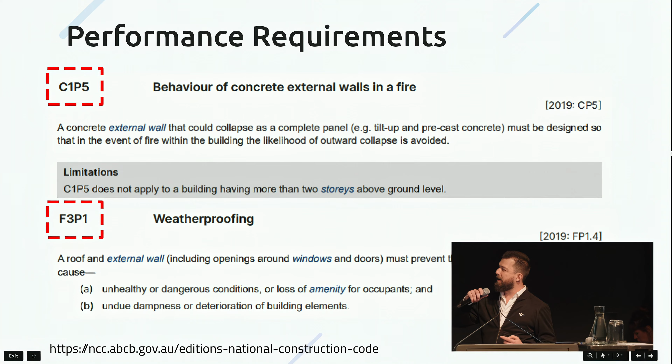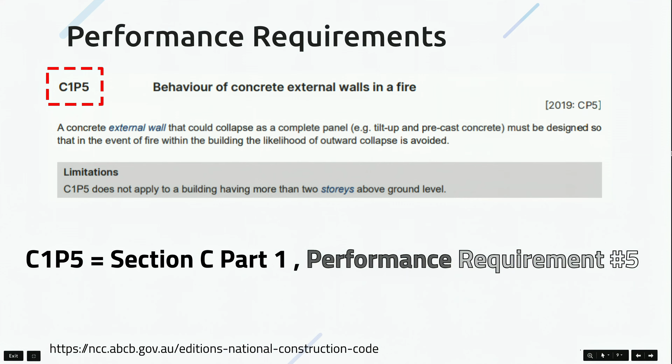Cool, James covered this earlier as well. It's the naming convention. How do you know you're looking at a performance requirement? It's the 3rd letter. So in this example here, C1P5 means Section C, Part 1, Performance Requirement Number 5. So anything where the 3rd letter is a P, that's what we're looking for.

So a performance requirement then needs a performance solution if we're going that way. And this is just what the ABCB defines as a performance solution: it provides a tailored solution to meet the intended objective of the performance requirements. Makes sense?

Okay, next one: how do we create a performance solution then? It's a good question. Sorry about this, guys, I don't know why that's lagging like that.

Okay, it's a 4-step process. We're going to go through each of these in detail. Step 1, we're going to prepare a brief that lets everyone involved know how we're going to approach this certain issue. Step 2, we're going to analyze the actual design we're proposing and maybe iterate and change it if it's not up to scratch. Then we're going to evaluate all of those results, compile them all together, and finally we're going to prepare the final report.

Okay, so step 1 is the design brief. Like I said, this lets everyone know what the performance solution is going to cover. The way this came about, it was actually introduced in NCC 2019 Amendment 1. The reason for this brief is that performance solutions, when they were rarely done, all looked wildly different. You could have one that was a 2-page document, very simplistic, and then you could have others that are 200 pages with a lot of supporting evidence, right?

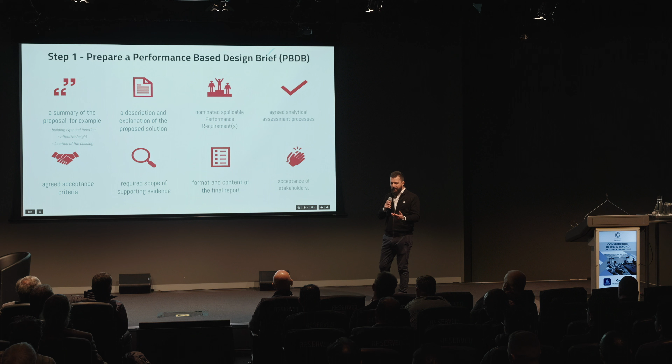Next one's quite important: agreed acceptance criteria. What would this be? Water doesn't come into our building - right, if we can prove that, then that's the criteria we're looking for. As an example, required scope of supporting evidence - so we'll define what we're actually going to deliver as part of that justification. Format and content of the final report, just a bit of an outline on how you're actually going to compile all this information so it can be digested.

And then finally, acceptance of stakeholders. Now, stakeholders is anyone that's involved in the delivery of that - your builder, your architect, structural engineer, maybe facade engineer, of course your surveyor, your PCA.

Okay, so let's do a bit of an example of what might be contained in this. So this is using facade. Facade's actually not my strong suit, but I think it's a handy little example here. What are the design objectives? Well, it's been identified that the cladding must provide a degree of weatherproofing in order to satisfy the performance requirement, being we don't want water coming into our building.

So who should be consulted? We identify that the client, the builder, the testing authority, appropriate regulatory or approval authority, which is our PCA or our surveyor.

Next one, what's the basis of the performance solution? Well, why does it have to be a performance solution? There are no DTS provisions, so by default it is going to be performance-based design.

What evidence are we going to use to justify this? Well, fortunately the NCC actually offers us a verification method. That's found in FV 1.1 and table FV 1.1. If you apply that verification method and get a positive outcome, then that's how we're going to justify - that's going to be our evidence.

Which DTS provision is applicable? In this case, none - we don't have any, unfortunately. And which performance requirement is applicable? So it's going to be FP 1.4 in the old way of doing things - I should have updated that now. It's F3P1: a roof and external wall, including openings around doors and windows, must prevent the penetration of water that would cause harm to the amenity of the building.

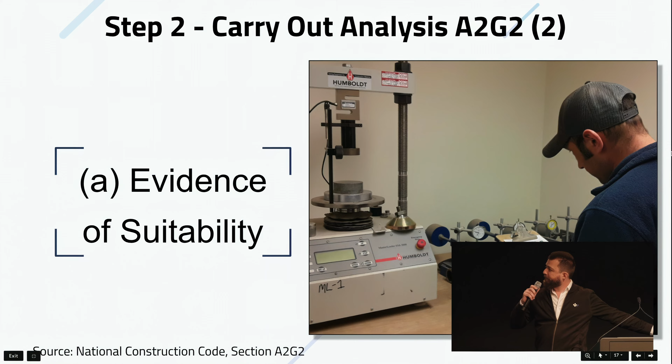Next one, verification method. So we talked about this. This is the FV 1.1. What we effectively have here is a mock-up, a prototype of a facade system. This is all well controlled, the amount of water, the amount of wind pressure we're applying against it. You follow this method that tells you how we're going to test out this prototype. And quite simply, if under these specific conditions water is able to come in, it fails. If water is kept out, then it's a pass. So nice and simple there.

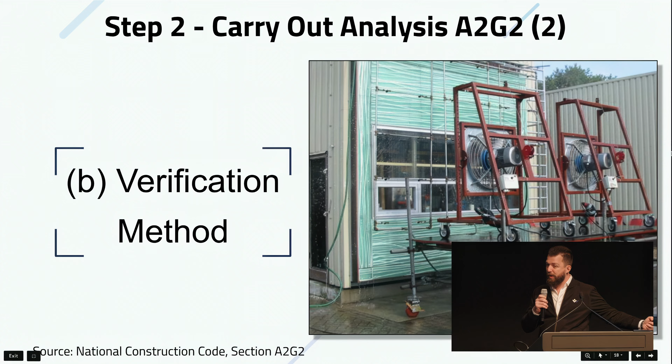There are a whole lot of verification methods. This one is mentioned in the NCC, but you don't actually have to use one that's mentioned in the NCC. It just has to make sense for the scenario.

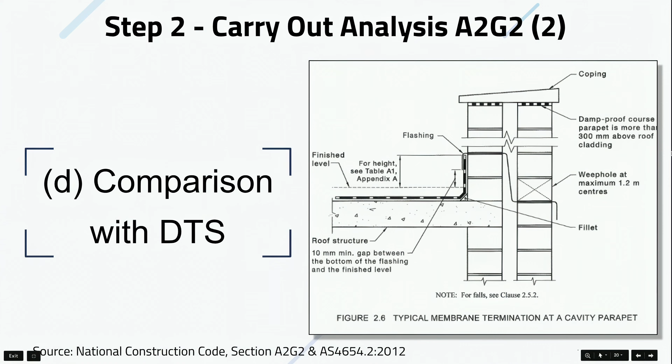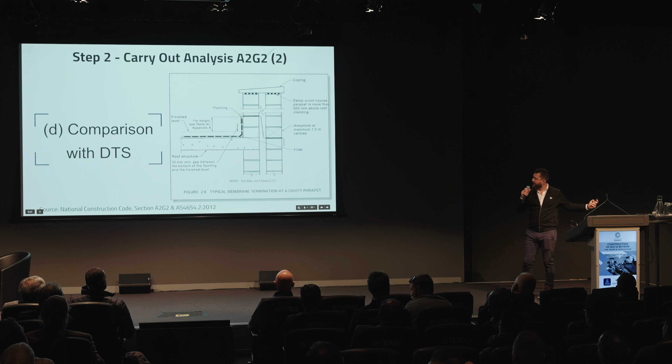We have upturns, we have cavity protection. Using a combination of expert judgment, you can say, well, okay, we've actually got a precast wall here, and we have a suspended slab interfacing with it, and we're going to apply our waterproofing upturn, and then we're going to have a high-build elastomeric paint over that and get continuity of the protection. We're not doing this exactly, but we are doing something that's going to be equivalent performance, and that's how we're justifying our performance there. So those are our 4 assessment methods that you have at your disposal to justify how you're going to perform.

So then after all those things, we've got this little flow chart here. It's pretty simple. This is just carrying out analysis. Pretty much what it says is do whatever you're doing, apply a test method, research the documentation. If it doesn't work, then go back and rethink it again. Maybe you need some more elements in there or move things around a little bit. Then apply the process again. We get a good outcome we're happy with, being we're keeping water out of the building most of the time, then yes, we move on.

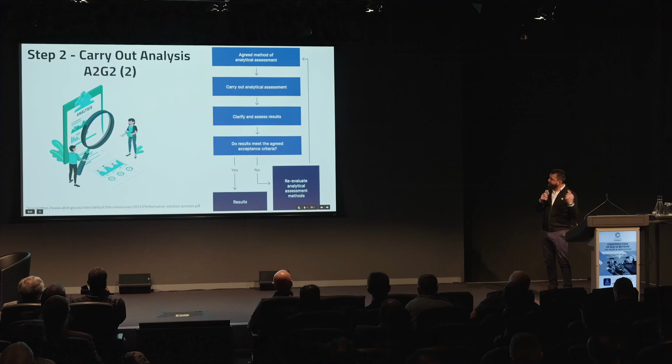And by move on, I mean step 3.

So step 3 is evaluation of results. I know this can sound very similar to analysis, but what this is, is compiling everything together. Often you'll have a lot of different supporting evidence doing different things. You might need an additive for concrete for a certain purpose, and then you need an upturn over here. Most performance solutions won't just be one element. They'll have a lot of things going on, and you need to compile it all together. I've got some examples at the end of this, which we can talk about, and I'll explain that further. That's pretty easy. Then finally, we prepare the final report.

So this is really just compiling everything we've done to date. We've looked at everything, we've considered all the options, we're just putting it together, and we're making it tell a cohesive narrative. I've seen a lot of performance solutions that have been rejected by certifiers, and it wasn't because they didn't have a lot of information. They actually had an abundance, 100 pages of documentation, but it wasn't compiled cohesively, and it didn't tell the story about how those things actually work together to give a level of confidence that the performance requirement's going to be satisfied. So don't fall into that trap. You have to tell the story and explain how it's going to happen.

Okay, a couple of examples. I've kept them not overly complex because we don't have too much time here, but I'll explain something about this because it is a little bit of a contentious one. I actually have to write an email later to this effect. This is tile and pedestals used to achieve a flush transition. And I know it's not exactly flush, but bear with me here, just pretend.

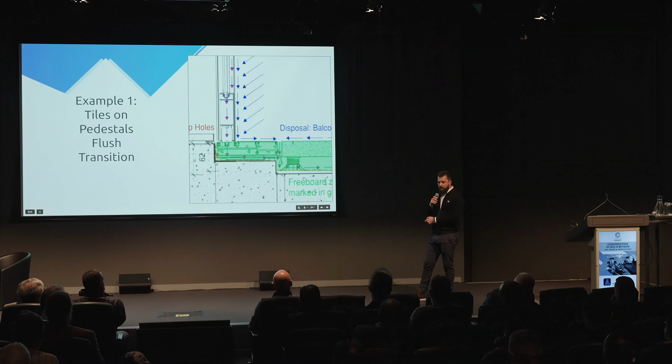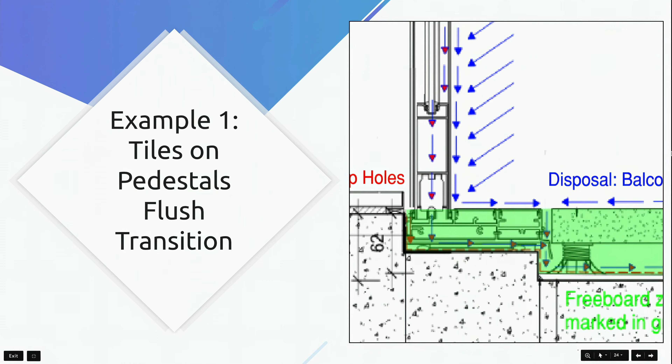So what's the right amount of drainage? Is 1 millimeter enough? 2 millimeters? 3 millimeters? 4? You go up and you start getting the area of maybe this will work. How do you actually know? Performance solution, right? We're saying that we're not putting a strip drain here. Our tiles and pedestals are going to do the drainage. We'll check how much hydraulic capacity there is between those tiles and pedestals, and we justify it that way. There's a few other things to consider about this, but that's effectively it. Really simple performance solution. You're trading one thing with another that's going to perform equivalently.

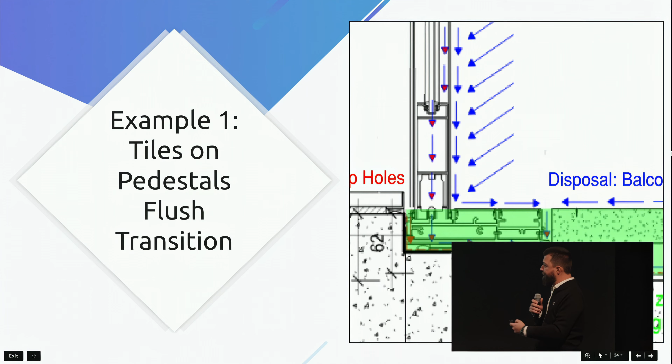Next one is windows in showers. Architects love these lately. Pretty cool. I guess some people like having a view or giving their neighbours a view while they're in the shower. What's the problem? We're getting a lot of water applied to this, right? And our internal wet area standard certainly doesn't say anything about windows, so there's nothing there offered.

But what it also does say is that you have to have a continuous membrane applied to a substrate. So unless we're going to call this window a water-resistant substrate and put membrane over it, we're definitely not complying with DTS. So what are the important things to consider? For anyone that's familiar, we have two performance requirements for our internal wet areas, and to put it simplistically, the first one is you must contain water in your wet area and move it to the drain. Pretty obvious. Second one is we don't allow any water into concealed space.

And as a quick solution for this, if you're ever in this, the key to all of it is to make sure water doesn't enter your cavity. How do you do that? You connect your internal waterproofing to your external weatherproofing. If you can use a water stop angle as a way of connecting those two elements together, you're going to have a continuous system, right? If water did try to get out around that frame, it's just going to run outside. No harm, no foul. So that's one example. We've got one more example here. I'll be pretty quick on this one.

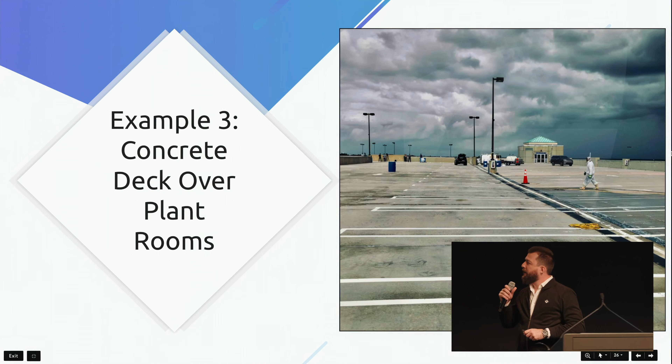Concrete deck over plant rooms. I just chucked this in here because it was one we looked at recently. Our external waterproofing standard requires a waterproof membrane tested to AS 4654.1. Is it possible to make concrete waterproof? Yeah, it is. It's not easy. There are a lot of things to consider. Degree of crack control, reinforcing, hydraulics, how fast we move our water to the drains is going to reduce risk, all of those sort of things.

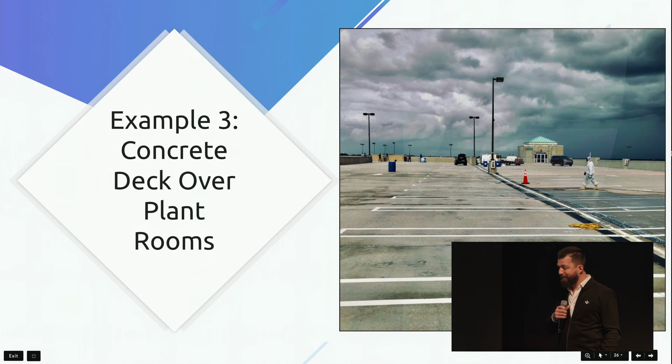So is it possible to delete your waterproofing from this design, even though you've got areas that need to be protected below? Yeah, it definitely is. You just need to demonstrate that you've thought of everything. And there are quite a few things to consider, but it is possible. Our waterproof concrete structure is then our membrane system, effectively. And I believe that's it for this section.

Cool. How are we going for time? Very good, thank you. So this is going to be a little bit of a change of pace. I will talk to this while I pour a drink of water. 15, okay. Got to be a little bit quick.

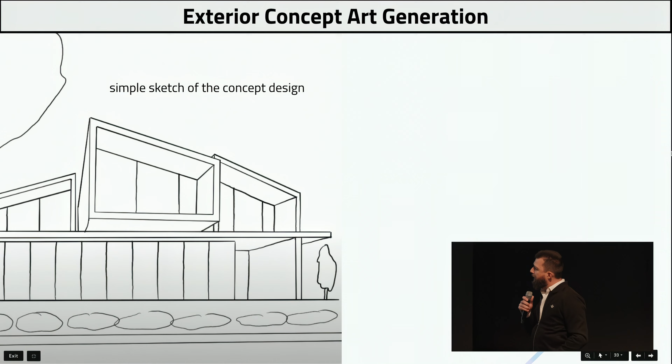So how do we apply that to design? So here's a sketch. I did this up in 30 seconds or so. And I said, this is the concept I have. And I applied a prompt to it. Let's see what that prompt is. This is what we want this to look like.

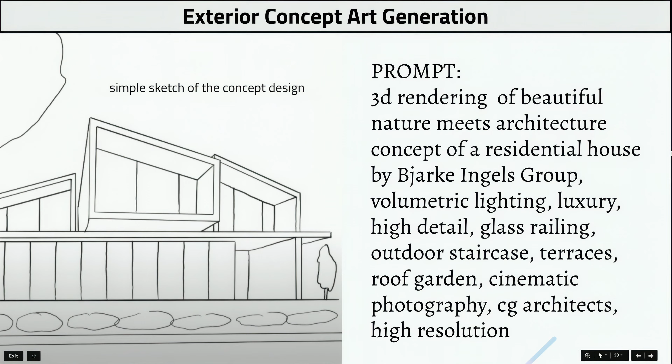"Nature meets architecture concept of residential house by Bjarke Ingels Group," famous architect apparently. High detail, glass railings, outdoor staircase, terraces, roof garden, cinematic photography, high resolution, right? Let's see what we got back. It was one of my first attempts, but that's pretty cool. All in 15 seconds after I put in the prompt. It takes about 15 seconds to go through 40 or 50 steps to reach this point.

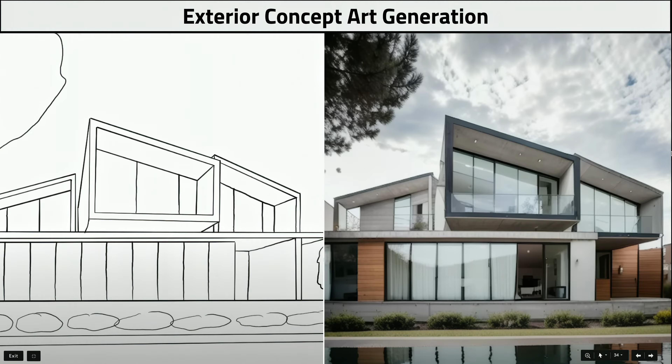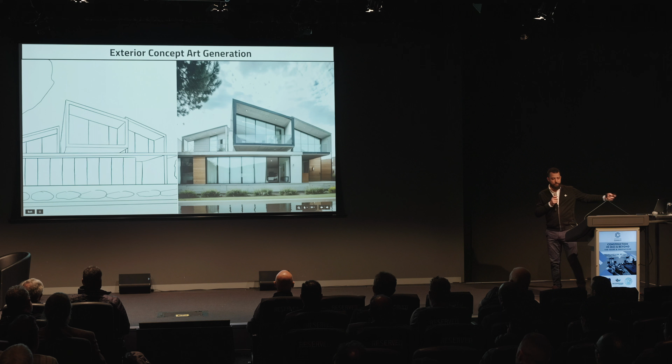So you see we've got our glass here. Externally, we've got a railing, a balustrade up the top like we asked for. Let's look at a few more. Another one, slightly different lighting. And then all I have to do is press generate again, because there is a degree of randomness with all of this. It's still in line with our original prompt, but it's totally different at the same time.

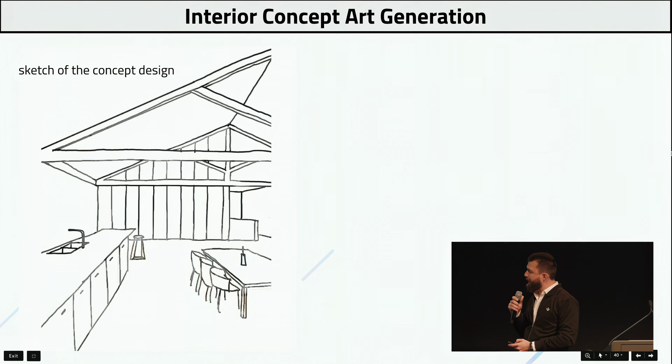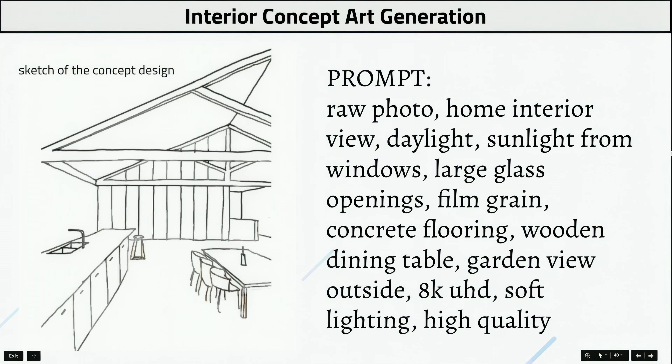Great, let's do the same thing for our internal space here. What are we applying for our prompt? Type, type, type. So we've got concrete flooring, wooden dining table, garden view, windows with sunlight from the windows and large glass. Remember all of those things? Let's see how well we did. Pretty good. I think we're hitting all the key words there. But again, you'll see some things that look maybe not too buildable.

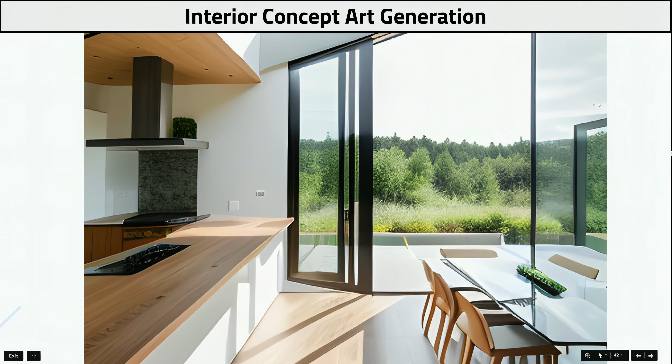Let's zoom in on some here. You can see our chair legs don't really make sense. Our door looks really weird. Our bench top here looks really strange. That's right. So maybe it's not so far off the truth, actually.

Okay, we're going to run through a few more here. We've done a sketch. We want to show the whole external of the house. I'll run through this pretty quickly. Actually, I do want to show something. You've got to be very careful with the way you write these prompts. So we've got a house inside a forest full of trees and plants. What do they give us? We actually have a house that is in fact full of trees and plants on the inside there. So, cool.

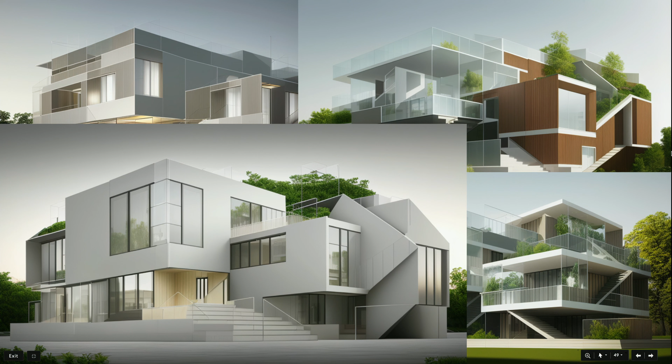I'll run through these pretty quickly just to make up some time, but you can just see the variation in the prompt we're applying to our sketch. These don't look very habitable. I think I was in a bit of a rush with these ones, but very cool for inspiration. Another one, we've got a cuboid design with a lot of glass. This is really just to show you the variety that you can achieve with these things. And that's it for that section.

Now, one thing I would have liked to include in here before I moved on, those are concept designs, right? And the way that these are achieved is by feeding a model large amounts of information, large amounts of renders, right? A million, a billion, the more parameters you have, the better the outcome's going to be. What if we wanted to do floor plans or section details? Process is exactly the same, right? You feed it enough information on what looks right, even feed it things that are wrong, but tell it why it's wrong, and it'll be able to do the same thing.

We'll be able to do a waterproofing section detail of a brick veneer wall with stud frame, flashing, waterproofing upturn interface with flashing. That's very doable, and I didn't include anything on that, but I should have, so just use your imagination.

So, spatial design. VR headsets have been around for a little while. How is this relevant to us?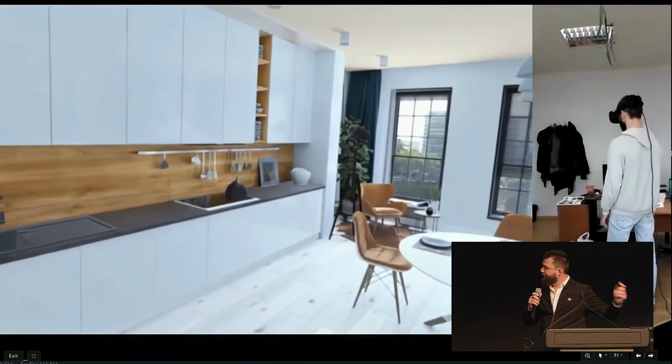Well, this sort of 3D render, right? Again, it's the end consumer and a bit of razzle dazzle here. To do this would have been significantly time consuming. All of these things measured and rendered and put in place and effectively handcrafted, right? We've got our participant here, presumably buying one of these apartments from the showroom. He's having a walk around.

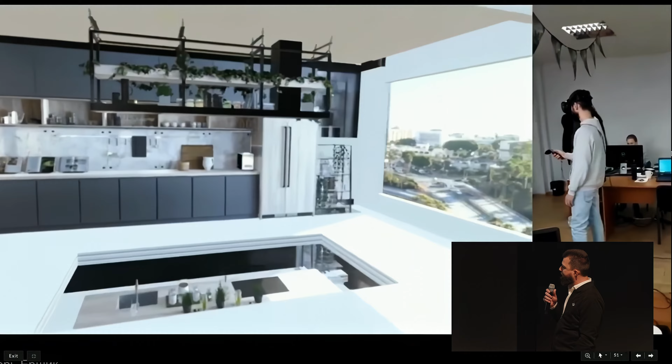In this space, we'll have a little bit of a thing soon where it swaps out. Yep, we're looking at a different package, different finishing package in there. All pretty cool. These take ages to prepare. What if we could use our generative AI to do this a lot quicker? By applying image diffusion into spatial design.

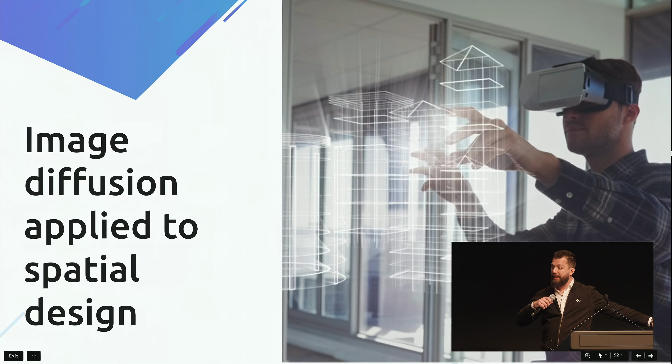So for some reason we're not getting any volume out here. I didn't plug it in. This is not the sound guy's fault at all, it is mine. External headphones.

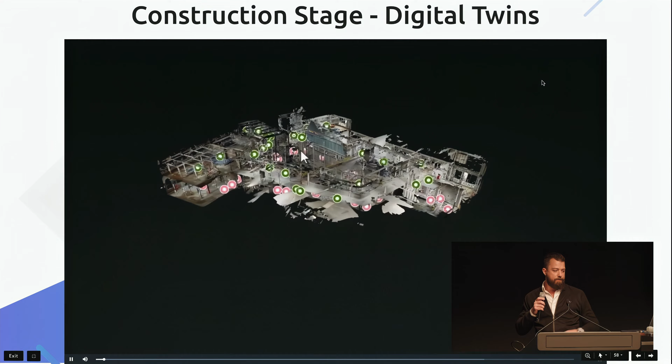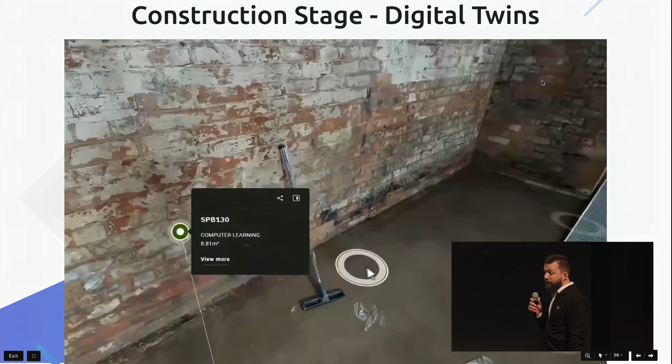A nice little video here. Digital twin is a word you've probably heard of recently for record keeping. This is effectively a dollhouse digital twin that's taken of a project in construction, a snapshot of a point in time. Imagine you're responsible for a project for plant delivery, you're on the other side of the planet, you need to check that things are going to fit in place.

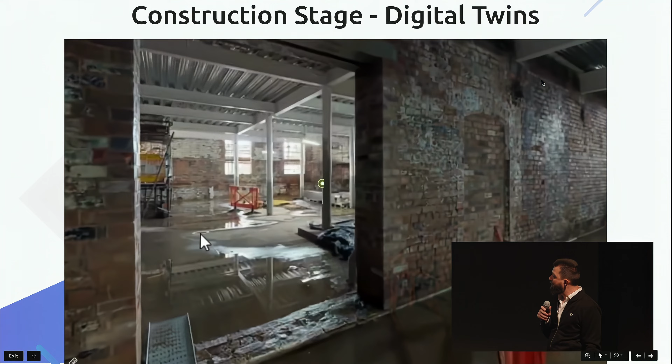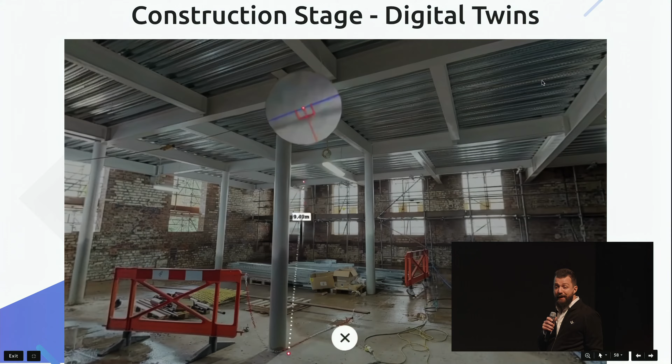Well, fortunately for this project, we've got a full digital twin taken that day. We're going to go in, we're going to measure that our plant or whatnot is able to fit into this space and we don't have to redesign it. So there we've just taken a measurement based on our on-site scan. It's 9.49 meters. We know everything's good to go for tomorrow.

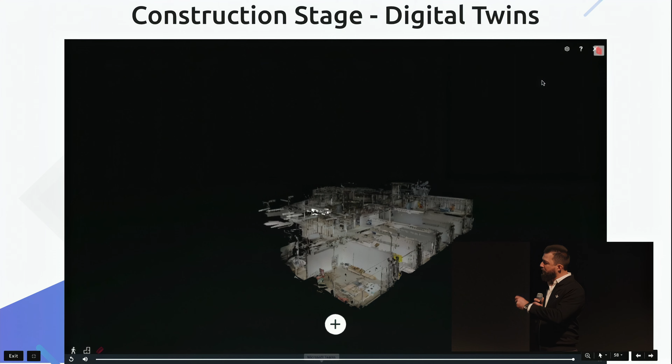What's the problem with this type of technology? It takes a lot of effort. Someone walking around there all day, taking those scans, then they've got to go back, compile them, upload them, stitch them together. There is great technology that does this, but there's still a lot of manual effort in it. So that manual effort and the cost associated with it is what's stopping us from having fully remote inspections effectively. How do we overcome that?

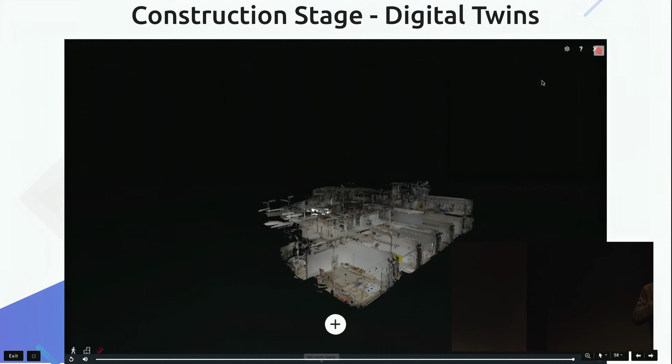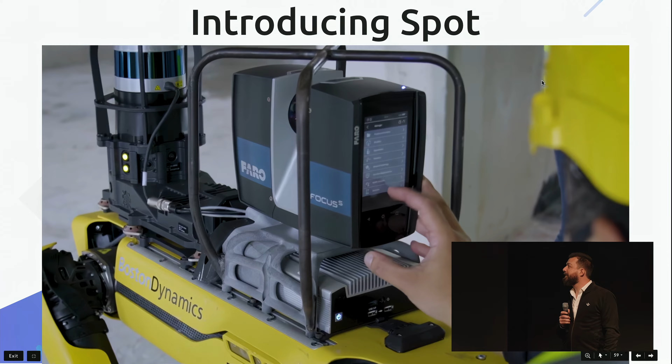3D laser scanning technology to capture and monitor site progress was integrated in the strategic plans developed by our Applied Research and Development Group. This enables Spot to capture constant, quick, and consistent scans of construction sites. This precision monitoring tracks progress, also checking as-built versus as-designed models. Scanning and post-processing times have been reduced from weeks to a matter of days, while freeing up staff resources. Spot's remote control features greatly improve site visit safety and efficiency.

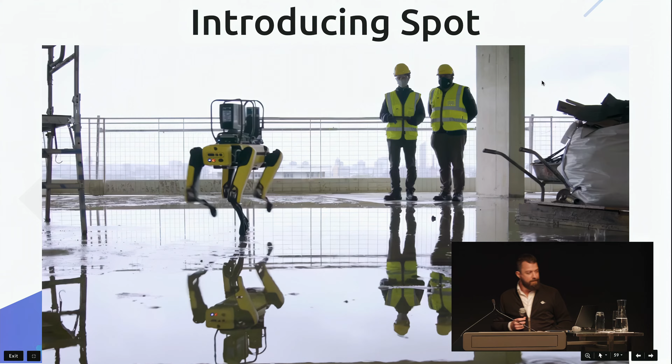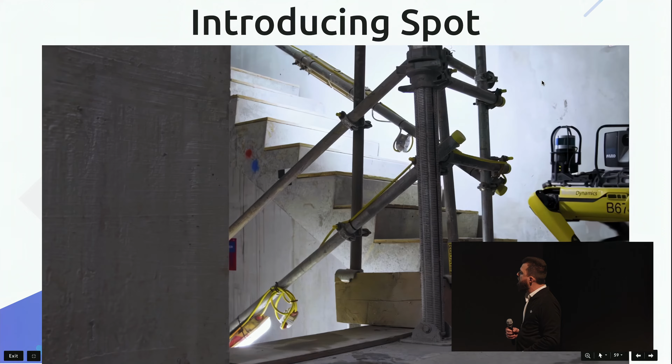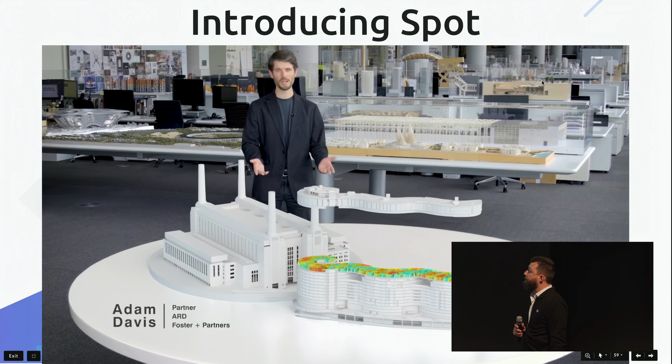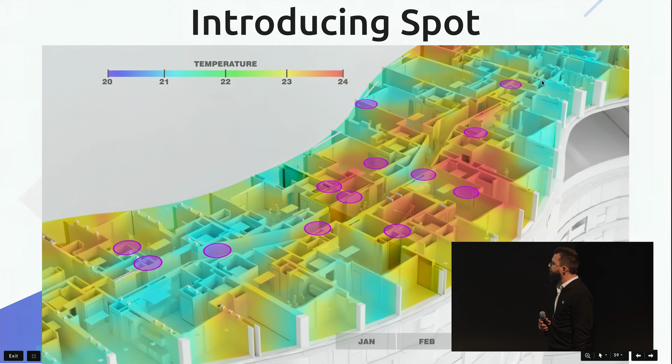Together with its ability to follow a pre-mapped route, Spot provides consistent repeated scans, navigates difficult terrain, and can access hard-to-reach areas on site. This technology could be used to create four-dimensional models of our buildings, highlighting how they change over time. Combined with data from sensors that read environmental conditions and occupancy, we can create an intricate model of how people, furnishings, and environmental conditions interact. These four-dimensional models can become virtual collaboration spaces, available to people who cannot physically be in the same location.

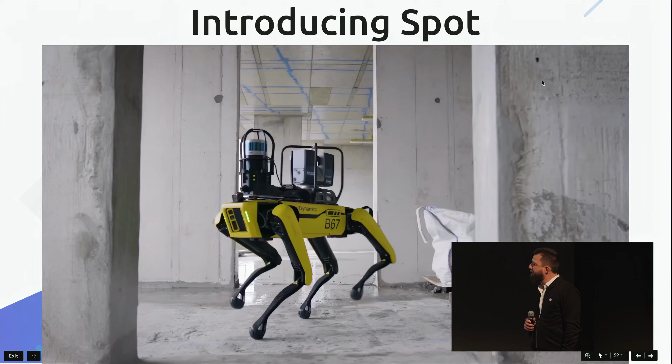Pretty cool. We don't have to do the surveying anymore. The dog takes the photos, comes back, plugs in somewhere, uploads them all automatically. Now, the thing I thought was really cool about that, you might have caught it where they said it's 4D modeling, the fourth dimension being time, right?

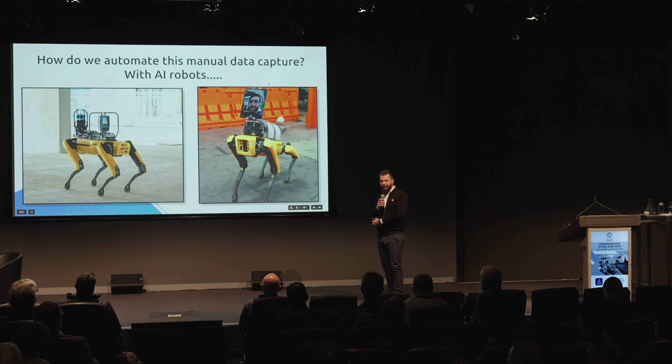How many building inspectors that go out after completion of the structure, you're looking for an issue or whatnot, you look at something and you're like, what's the build-up of this wall here? Like, what's happening? I wish I could see inside. I don't want to do destructive demolition. You're trying to solve a problem for the client, get an outcome.

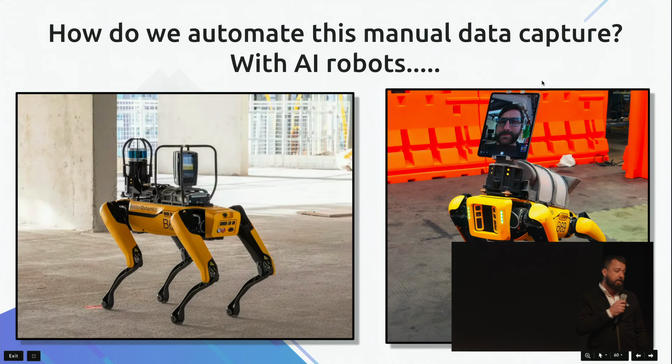Imagine being able to look back through the documents, have a digital twin of every day, every second day, third day. You just scroll through, peel back all the walls through time, see what was in there, see where your services are, see where your studs frame, all the structure is behind everything. Very useful, a lot of value in it, but it is an investment up front. Okay, next point.

AI bots for access to information, right? Everyone would be familiar with ChatGPT and whatnot. Cool to talk to an AI and have it respond back to you. What's the real use of this? It's access to information, right? We don't want to go and sift through standards and try and find clauses and whatnot. We're a natural language society. We want to talk to someone and say, hey, where's this clause that talks about X, right? Well, to that effect, I would like to introduce you guys to Aquila.

She's actually live on our website at the moment. Feel free to have a go, have a talk to her. Aquila is an artificial intelligence that's been trained on currently limited information. We're just really focused on the waterproofing standards. So 3740-2021, 4654.1, 4654.2, 4858, BS 8102. We put a lot of that in there.

So she's up there. Now, let's just see if we can have a quick conversation here. Refresh this. Okay. Again, our internet's not great here, but it seems to be working well enough, so let's go. Hi. Give her an easy one to start with. What is a pressure seal? Include source.

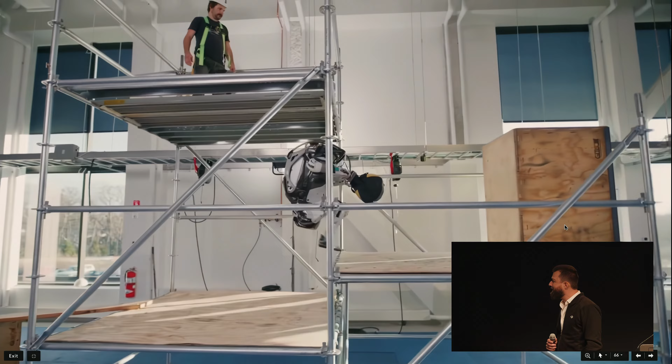Well done, what a show off. If I had an apprentice with half that pep, I would consider myself very lucky.

Okay, so I'm going to leave you with this quote. You don't want to abandon the skills and experience you have gained, but to find a new way to apply them. Your eye is on the future, not on the past. Often such creative readjustments lead to a superior path for us. We are shaken out of our complacency and forced to reassess where we are headed.

I think that's a nice way to wrap up the opportunities that we have in the future, and I hope you guys are a little bit more excited about it. Thank you.